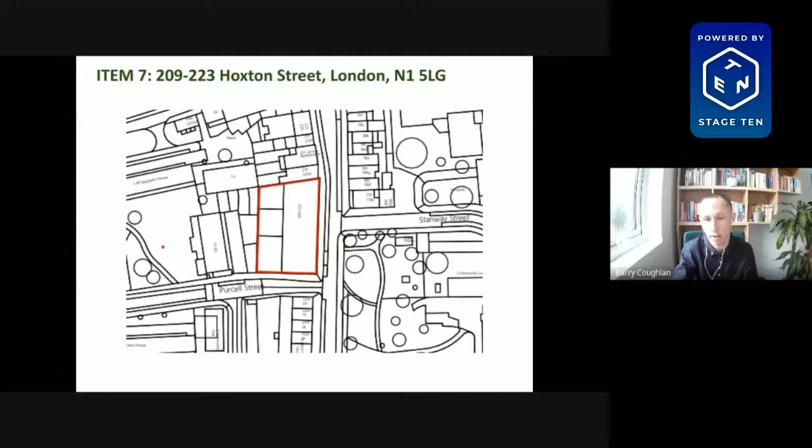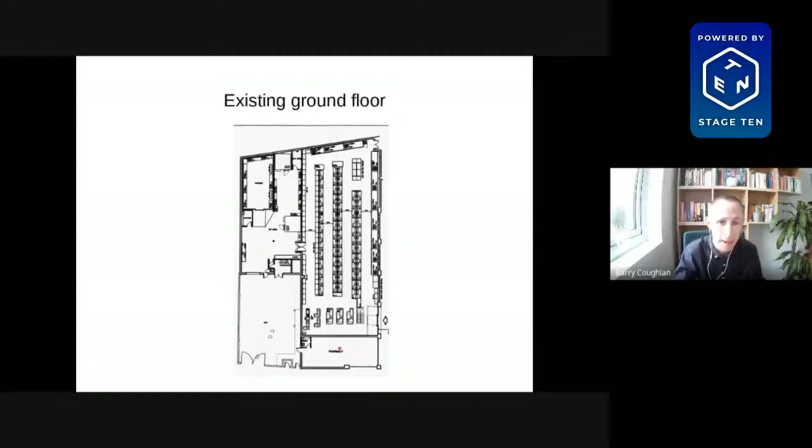The proposal would result in the loss of the small retail unit. Policy does seek to provide small retail units in retail developments of this size.

However, in this case, given the nature of the surrounding context where there are already a large number of small independent retailers, and given the benefits that a large retailer brings to the vitality and vibrancy of the town centre, the loss of that unit is considered acceptable.

This is also subject to a contribution of £30,000, which officers have secured in order to be put towards general improvements in the immediate area and to support small retailers.

It's thought that these two matters combined make the loss of the retail unit acceptable. It's noted that there's been a slight change in the wording of the relevant policy as it relates to the small independent unit. However, overall, it's not considered that this change would make the loss of the small retail unit unacceptable on this occasion.

It's worth pointing out that this was found acceptable previously, and that the surrounding context has not changed significantly since then.

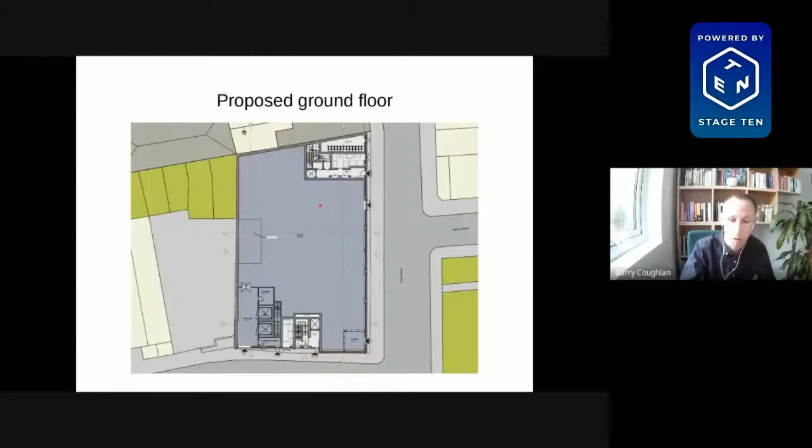We'd like to extend the condition to restrict permitted development rights away from use class E(a). We can provide further detail on that, but just to make that verbal change now, if possible.

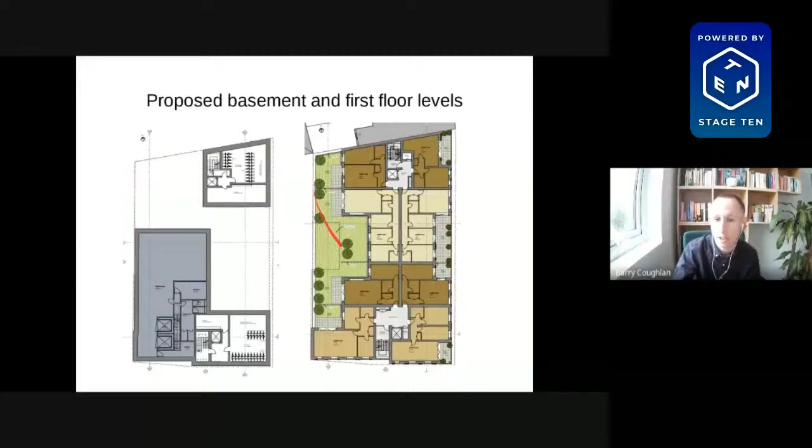Just running quickly through some of the layouts, you can see how the building is recessed in certain areas to break up the massing. You can also see the provision of landscaping at this podium level to some of the units at the rear there.

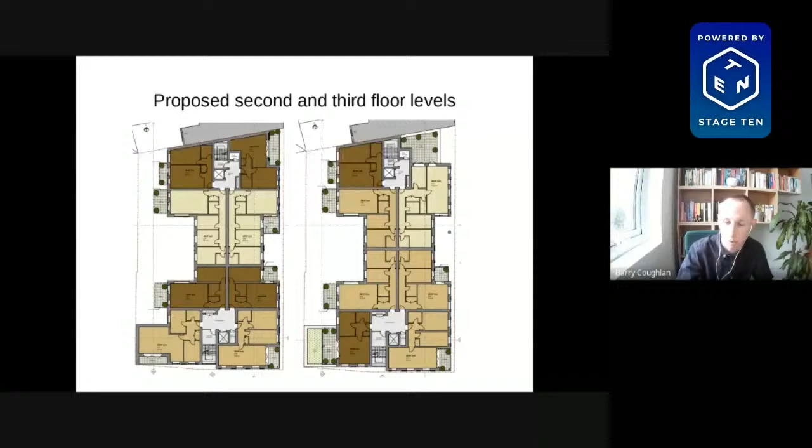Just moving through some of the other floor plans, you can see how the units are laid out. There's access from two cores. Each of the units meet the minimum space standards and have acceptable provision of daylight and private amenity space.

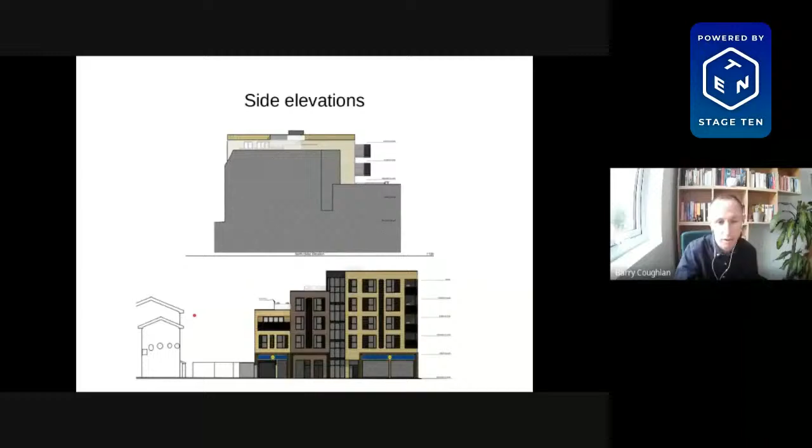You can see how the building steps down away from the corner to address the context of residential buildings to the rear. These are the front and rear elevations.

You can see again how the 5-storey element is on the corner, stepping down to 3 storeys as it abuts the buildings to the north.

You can also see the change in materiality and how this is intended to break up the bulk of the facade. You can see the rear elevation here as well, and the position of windows and balconies as they relate to the rear elevation.

So just turning to the residential use briefly, as with the previous proposal, the proposal is for 25 PRS units to be provided. That's private rented sector units.

These differ slightly from residential units in that they're all held by a single owner and held in the same management, and they're provided as self-contained units let separately for longer tenancies than are ordinarily the case for private sector rented units in the open market.

So the benefits are that it provides greater security of tenancy, better management, and also allows a more professional on-site management.

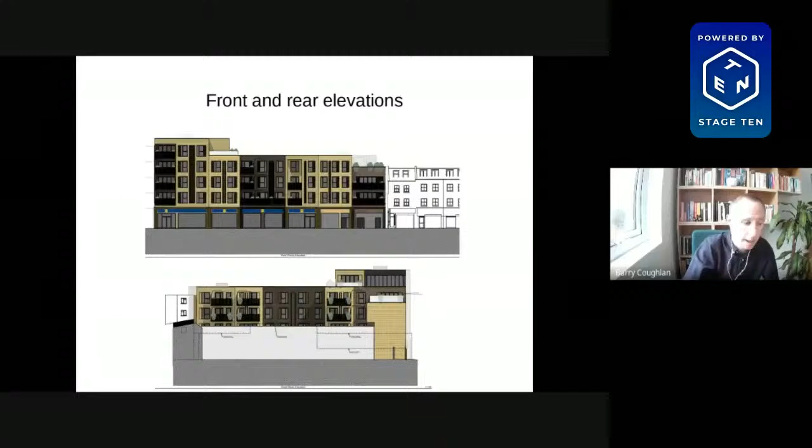The impact on this green space has been assessed, and the extent of overshadowing caused by the proposal is negligible. So overall, those impacts are considered to be acceptable.

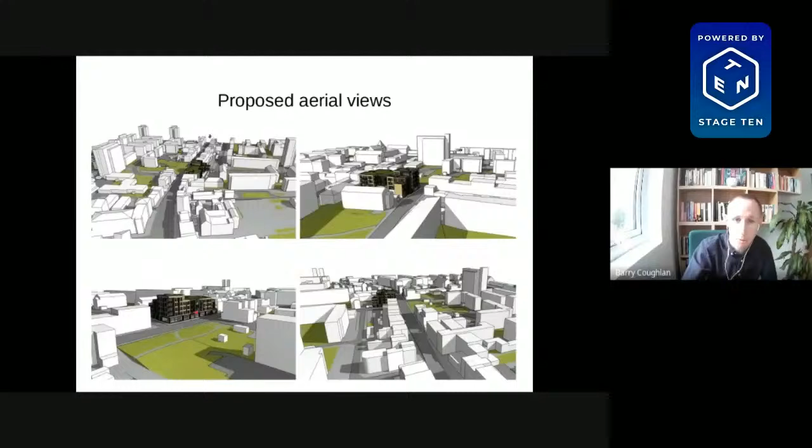This is a view looking north up Hoxton Street. With the proposed development in place, you can see how it raises on the corner of Purcell Street, but then drops down as it gets towards the context to the north.

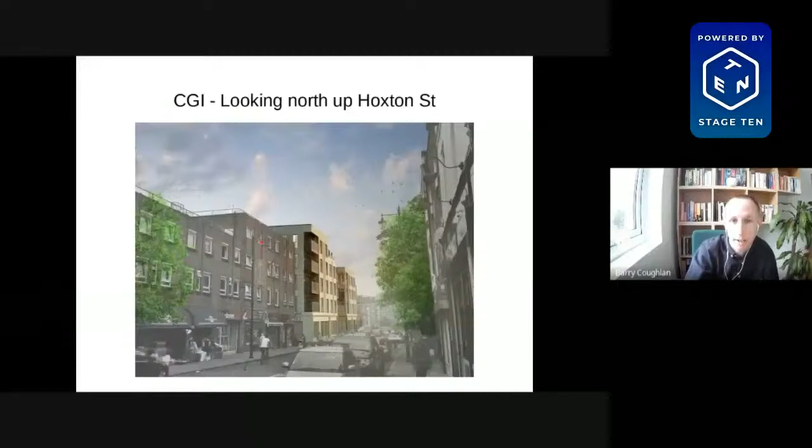This is a view from the opposite side of the street on Stanway Street, and you can get a feel for the proposed architecture, the change in materiality, and the use of brick and recessed balconies. This is a view from Purcell Street, with the proposed development in place, and you can see how it drops down, or steps down, to address the residential units to the west.

This elevation is also where the development will be serviced from, so it'll be serviced from the street, which officers consider acceptable. On Saturdays, given the market operating, a condition is recommended that would restrict the use of HGVs on that day, but otherwise the transport impacts are considered acceptable, and overall the scheme is considered acceptable.

The sustainability contributions and conditions have been updated to reflect current policy and are also considered acceptable. Overall, the scheme is considered acceptable and is therefore recommended for approval. Thank you, Chair.

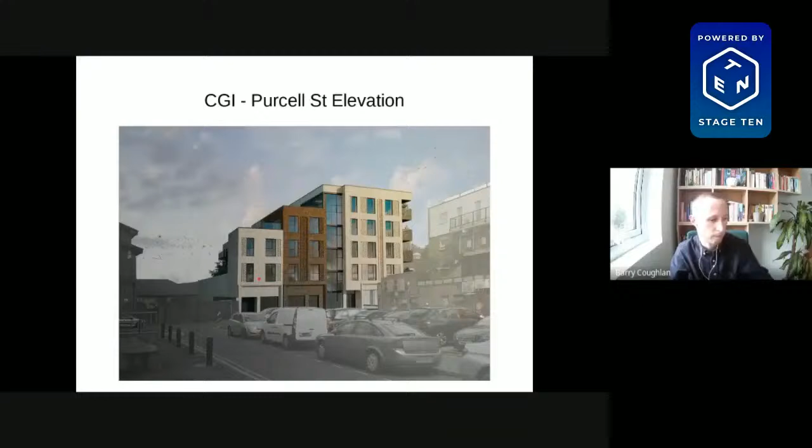Committee, my name is Chris Betteridge. I'm planning consultant on behalf of Iceland Foods.

The subcommittee will be aware of the need for affordable housing in the borough. Policy LP15 requires residential build to rent developments to be made of 50% affordable housing. The application proposal only provides 36%. Adams Integra, specialist viability consultants commissioned by Iceland, advise that the proposal can deliver more affordable housing whilst remaining viable.

Adams Integra advised that the applicant's viability assessment contains assumptions which have not been robustly challenged by the council's assessor. Build costs are excessive, with a number having been agreed on a meet-in-the-middle basis without any supporting evidence. The design fees are excessive, with a flat fee of 10% applied, resulting in a cost in excess of £1 million, with no specific evidence to support these fees.

Finally, a greater return could have been achieved if the proposed retail unit had been open to offers, including an offer from Iceland. A more robust assessment of the applicant's viability assessment would suggest that up to 3 more affordable dwellings could be delivered. Given the need for affordable housing, the council should take a more robust approach to reviewing viability assessments, requiring applicants to fully evidence any reduction in provision. The applicant has provided insufficient evidence to support its case for a reduction in the affordable housing requirements.

Local Plan Policy LP37 states developments of retail units of 1,000 square metres must provide a small retail unit. No small shop is proposed and no justification is provided.

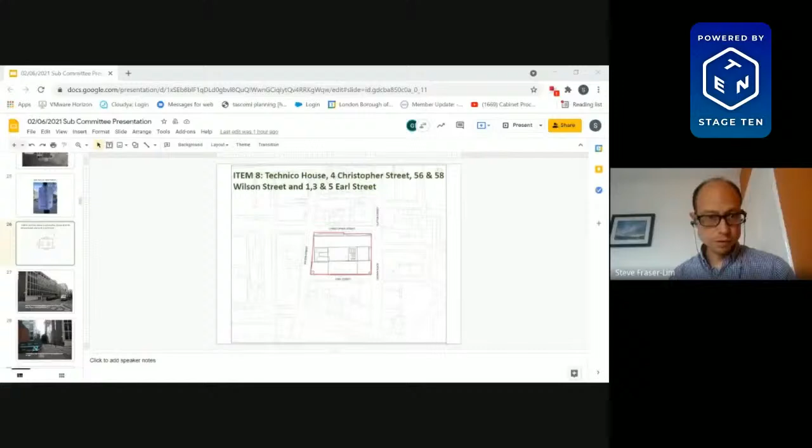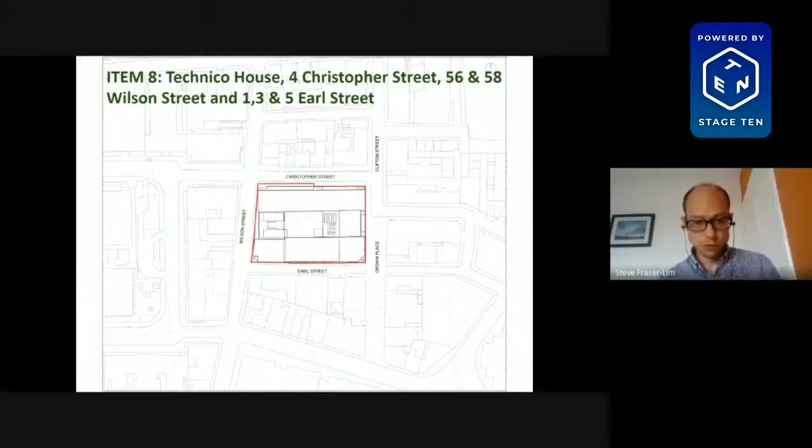Okay, so application site is Technico House. It forms its own block surrounded by Christopher Street, Wilson Street, Earl Street, and Clifton Street, and part of Crown Place. This is one of the two buildings that form the single site Technico House, looking down Clifton Street with the application site on the right.

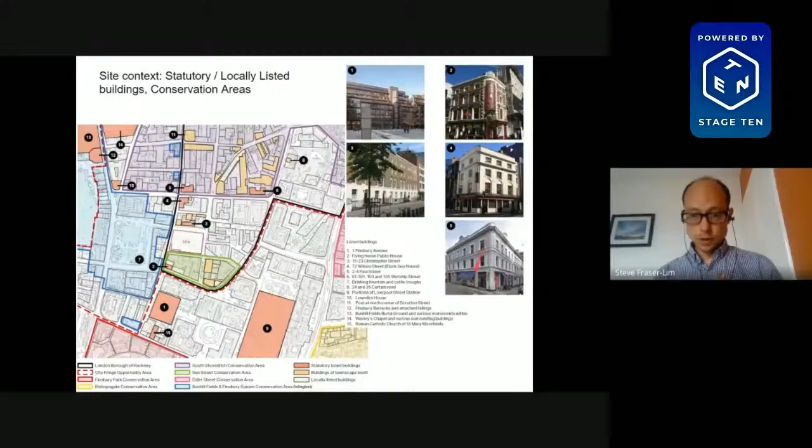There's a number of listed buildings around and about. For instance, number 3, 15 to 23 Christopher Street is Grade 2 listed, just on the opposite side of Christopher Street to the north. The Flying Horse Public House is also listed, on the corner of Sun Street and Wilson Street, and there are other heritage assets around and about.

The area is also within the Central Activity Zone, within an opportunity area in the London Plan. There's been a number of other large-scale developments that have taken place around and about, either in the neighbouring area, which is City of London, or in Hackney itself.

For instance, number 1 is 2 to 3 Finsbury Avenue - a large-scale development that's been approved, referenced in the committee report. Number 2 is 1 Crown Place. Number 3 within Hackney is, I think, 14 to 15 Appold Street, a 45-storey building, and various other large developments, for instance Principal Place and the Stage, not that far away.

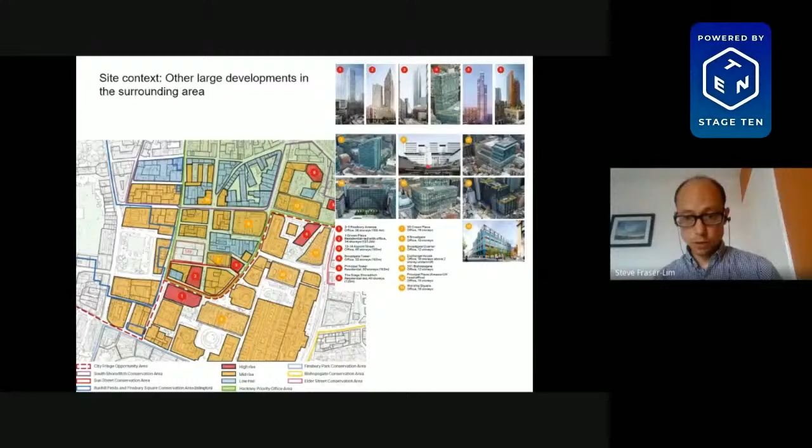And then in the City of London, for instance, you've got nearby other developments as part of the Broadgate Quarter here, for instance building number 8, which is relatively close to the site.

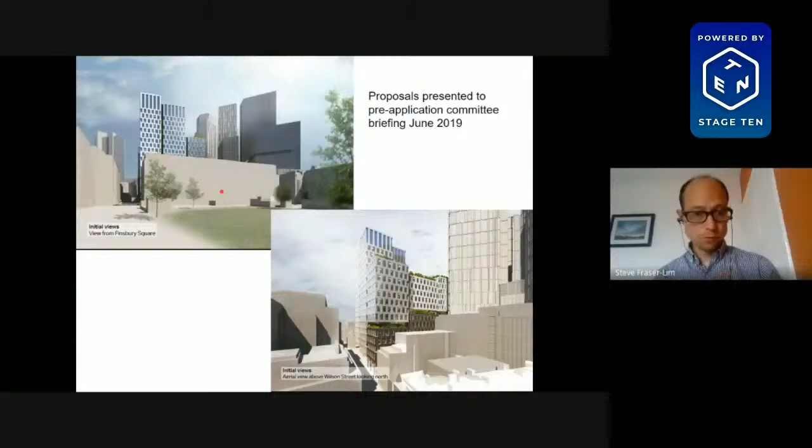Members may remember the application from the pre-application committee briefing - there was a briefing in June 2019, when the proposals were for a series of tower elements. As the proposals changed due to discussions around the site designations, conservation areas, listed buildings, views and things, the massing reduced, or the overall height reduced, but the massing was still a concern, as you may recall from the November '19 committee briefing.

So we move on to our current proposals, which have responded to the pre-application discussions, the issues raised, and the design review panel comments.

On the ground floor, we've got the main office entrances from Clifton Street and also from Wilson Street, retail on the corner to provide active frontages and interest at street level, a loading bay area to service the development from Earl Street. There's an entrance here to access the basement cycle parking, and also an affordable workspace facing onto Christopher Street, on the north side here.

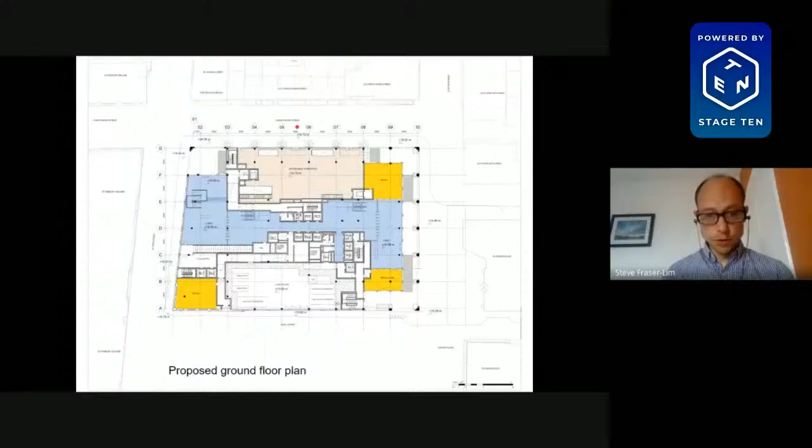At the basement level, there's still a substantial amount of affordable workspace here, also cycle parking, and other cycle parking facilities - a cycle hub facility for repairing and maintaining bikes and things like that.

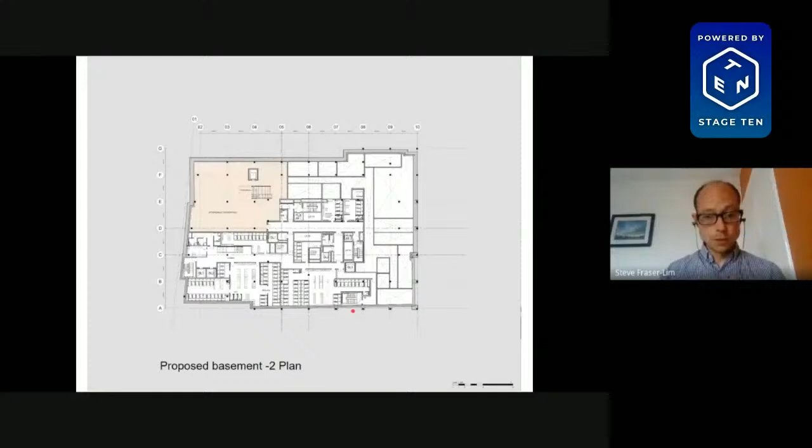And then at basement 2, there's also other ancillary facilities for staff, showers and lockers and things. There are a couple of other basements, but that's containing plant, a couple of basement floors below that.

Moving upwards, you've got the upper floors. At the lower levels are a large office floor plate with a central core, but then you can see how the massing has cut back to mitigate the visual impacts of the development in various street scene views.

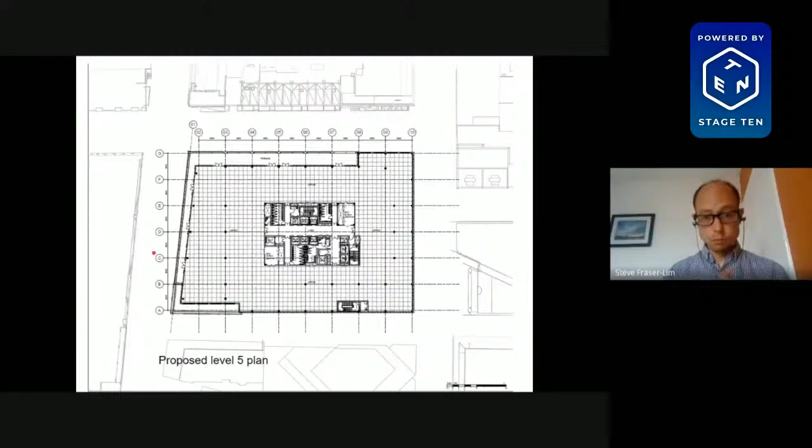So this is the setback above that retained facade at the corner there. And then as you move upwards, there's further setbacks to the north, to the west, then a wedge cut away from this southeast corner, and then further cuts back to the facade to reduce the massing.

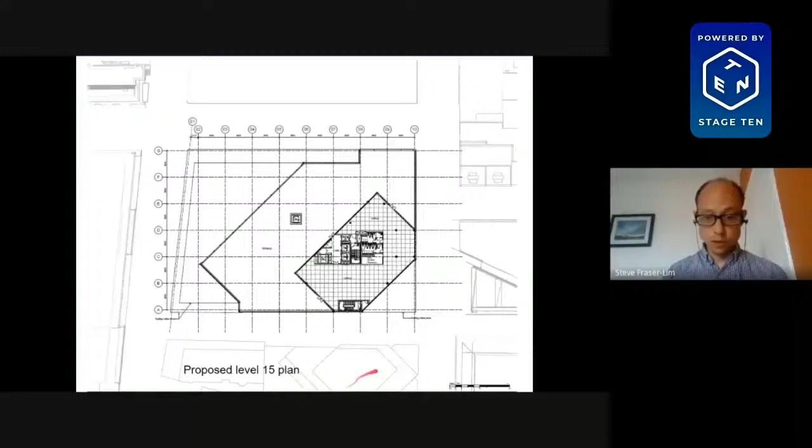As you move up the building, that's up to level 10, level 15. Again, you're now at the tallest element here, and it's also cut at an angle to reduce the impact on 1 Crown Place to the south there. And then plant and servicing, building maintenance facilities, equipment at the top.

Here the building facades, and you can see the articulation of the massing and the cutaway elements here. This is the north elevation of Christopher Street.

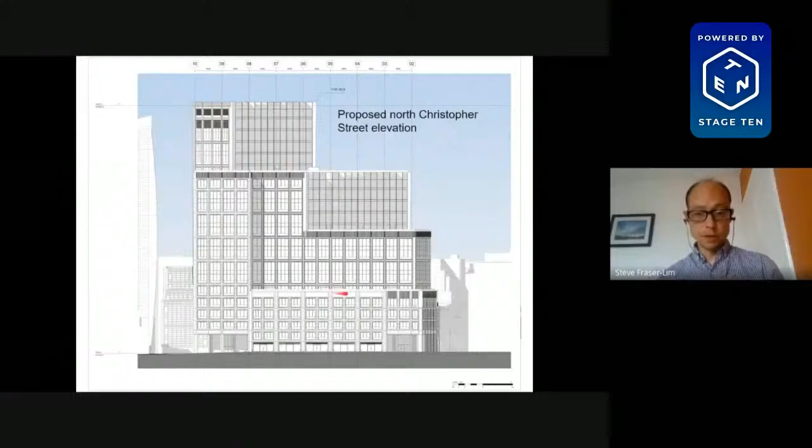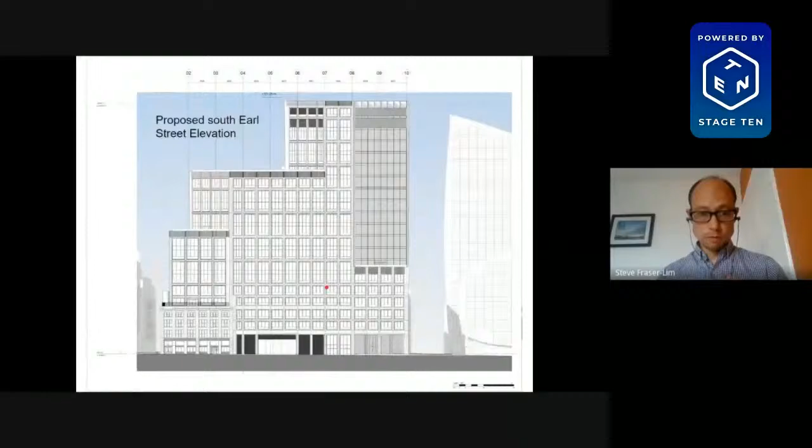So there's the base of the building, and then a middle section which is set back a bit to reduce the apparent massing of the building, and then the taller elements at the top. And you can see the Clifton Street elevation. There's a wedge there cut into the side of the building. Earl Street and Wilson Street.

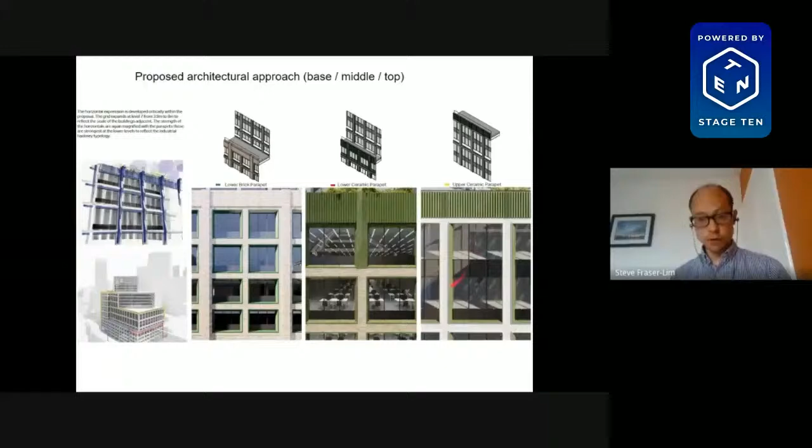The architecture, you can see you've got those three elements. You've got at the base of the building, predominantly brick, some terracotta, green terracotta window reveals, some parapets are ceramic parapets, green, at the mid-level, and then at the top it's lighter with more concrete frame, and also significant amounts of glazing where you get that wedge slice through the building.

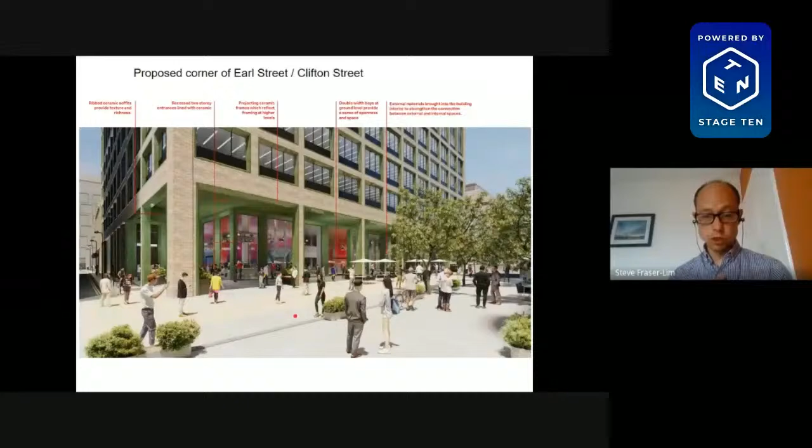And then you can see now the base where the building relates to the ground floor and the surrounding streets, with those retail units on corners, corner of Earl Street, Clifton Street, Christopher Street and Clifton Street, so looking down from the north a bit, and then the corner of Wilson Street and Christopher Street.

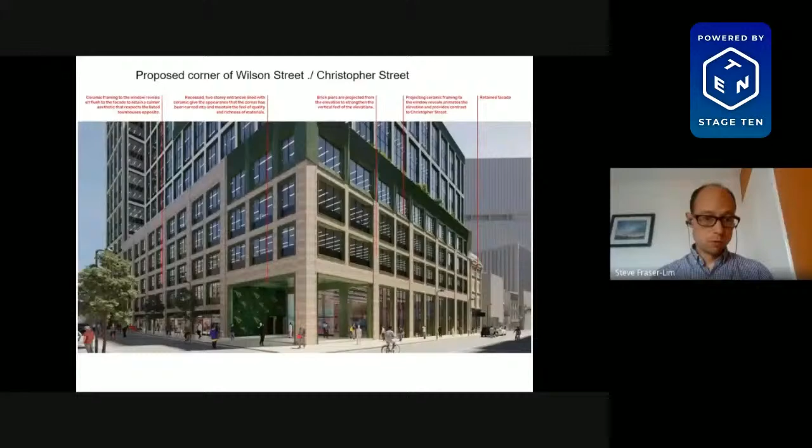So this is one of the office entrances there into that space. The corner of Wilson Street and Christopher Street.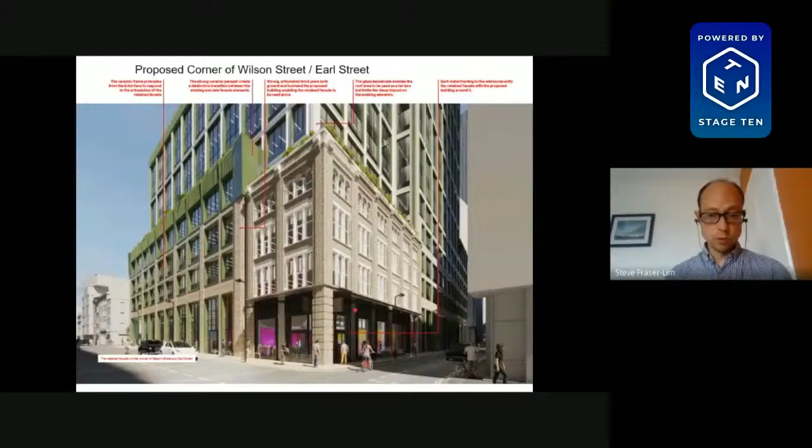So the proposals do retain this facade that's existing on the site at the moment. I should add on this slide, we're not happy with the proposed shop front that's to be installed, shown on this plan for the retail unit on that corner. So there's a planning condition to require a more traditionally designed shop front, which the applicants are happy to redesign. So we'll deal with that at the condition stage.

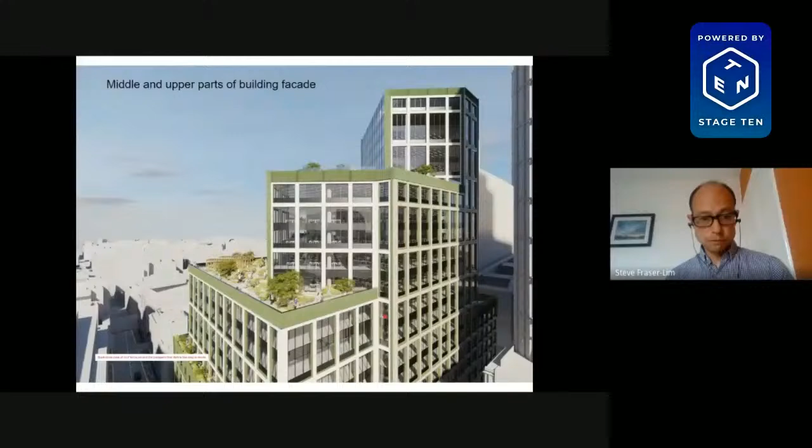And then you can see the upper parts of the building as it cuts and slices back to reduce the visual impacts from the different views. And again, you can see the glass slice through here, the light elements contrast with the more solid base further below.

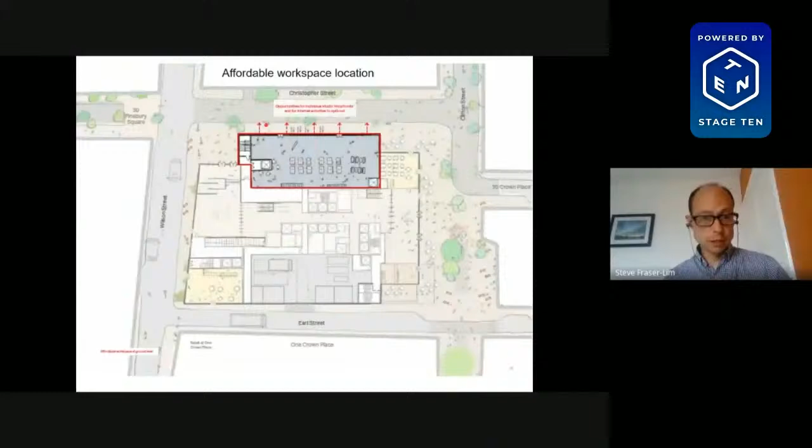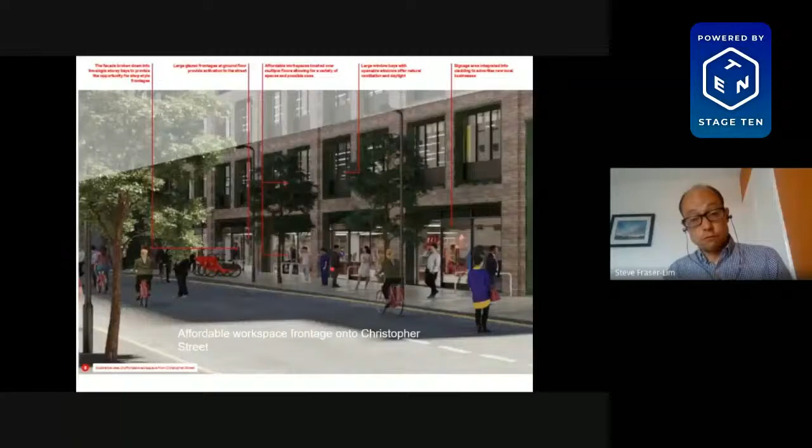Just a bit on affordable workspace. This is the ground floor. It's got direct access onto Christopher Street to the north there. And this shows that facade. So there'll be ability for occupiers to have window displays, shop fronts, and also ease of servicing and bringing things in and out.

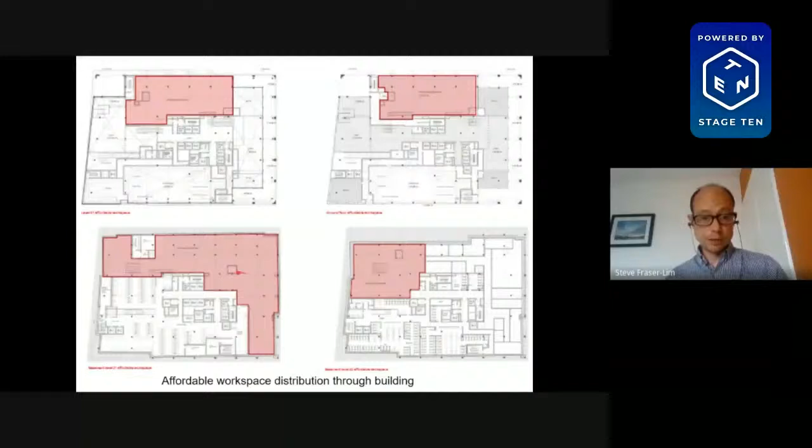The affordable workspaces on ground floor, and then there's also a mezzanine level above ground, and then two lower ground floors. There was a concern raised during the application stage about the light to the lower ground spaces, but we feel that's been addressed with some light wells introduced within the building, and also pavement lights and a staircase feature to bring light down into the lower levels.

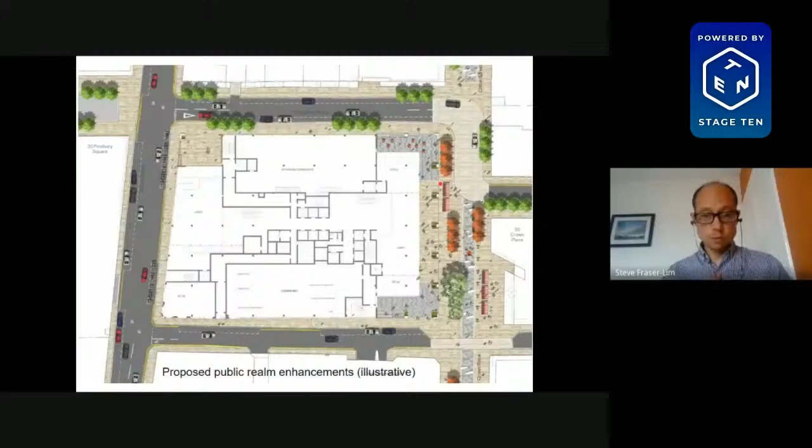It's at the moment, because the detailed design is yet to be fully worked out, but it will involve new surfacing and paving, street furniture, and landscaping, with the ability to accommodate market stalls and similar flexible uses during the day.

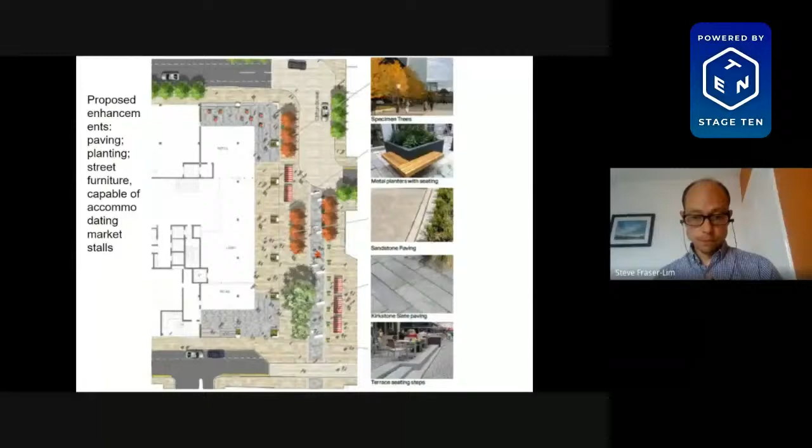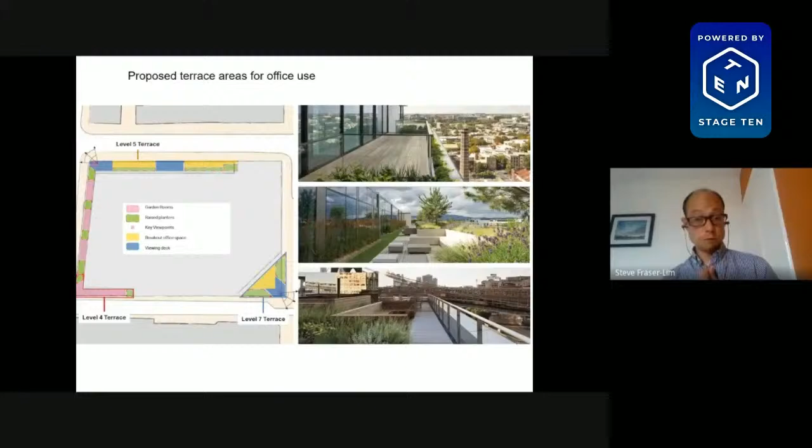The cutout sections to the building provide landscape terrace areas, which will be an amenity for the office occupiers. You can see some images from the design and access statement showing how these could work.

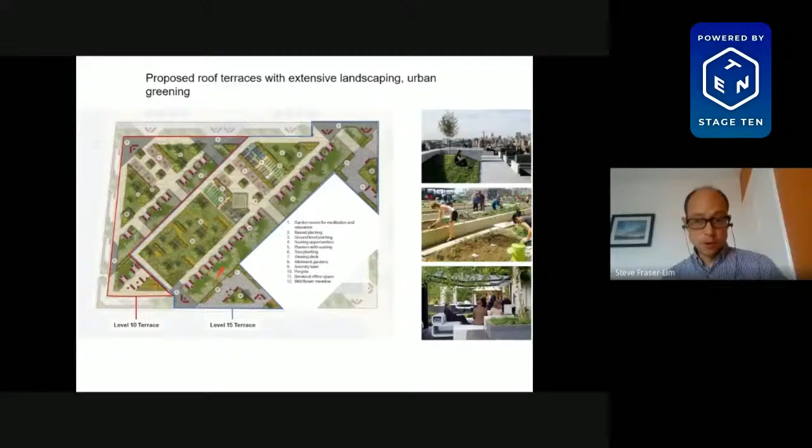They are really quite substantial in size, and the proposals are for extensive soft landscaping areas for outdoor meetings and other activities, with substantial build-up for planting, including trees.

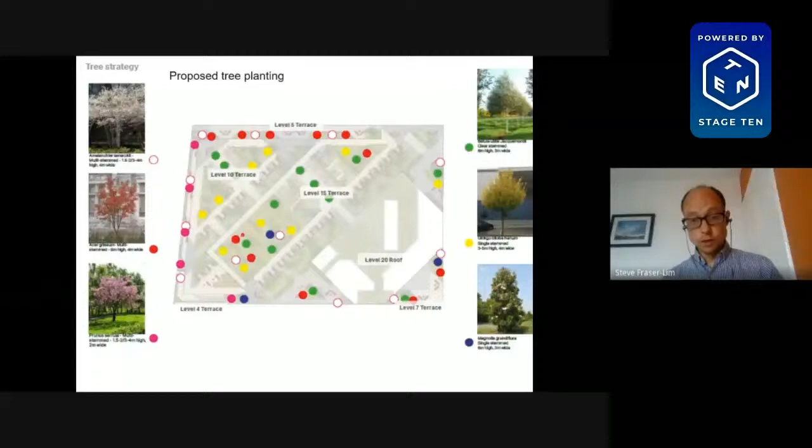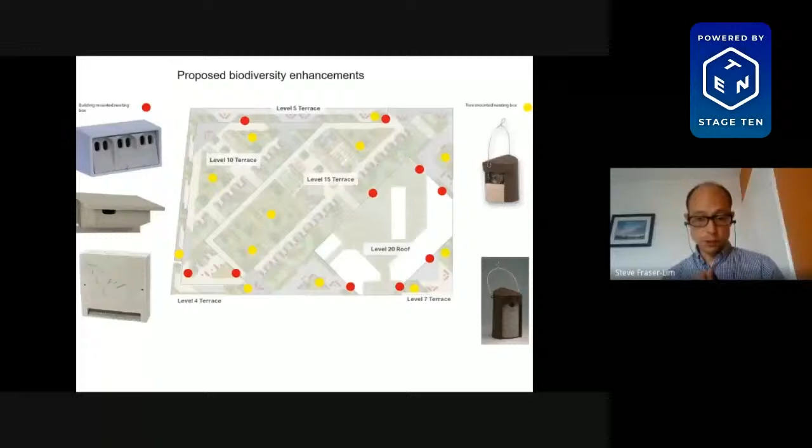So you can see significant tree planting proposals throughout the roof spaces of the building, and also biodiversity enhancements in terms of bird and bat boxes. The proposals will be quite beneficial in terms of urban greening and improving the urban green factor of the site.

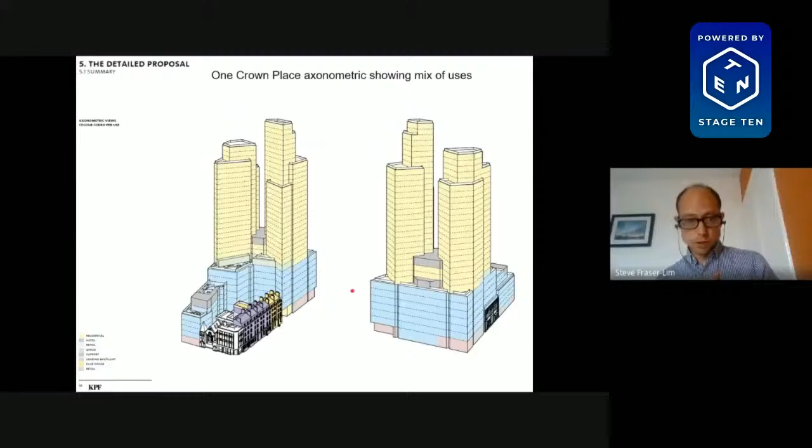And you can see this is the view from One Crown Place — this is the facade that will be immediately adjacent to the application site. We've looked at the layouts, the flat layouts of that development, as well as visiting the site itself, as you can see from some of the photos.

And then on level 7, there's a shared amenity area for occupiers, and also an external amenity space, which has been assessed for overshadowing impacts. The main areas that are affected are this north tower.

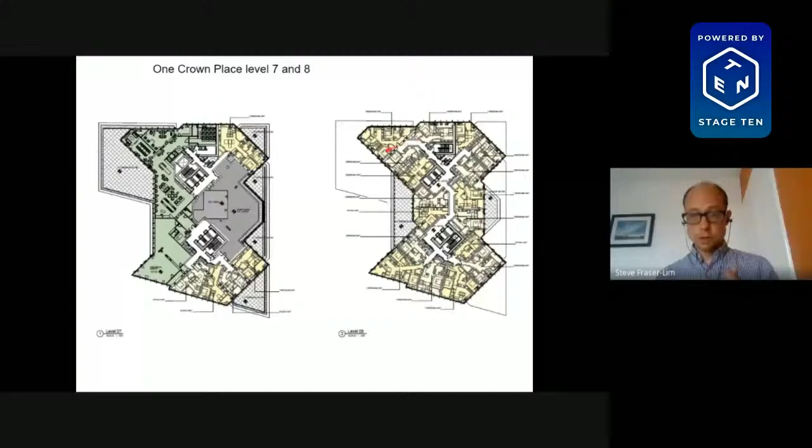You've got these corner units, which have a bit more of a dual aspect, so the impact is slightly less on these units, but there are some single aspect north facing units in that gap, which will be the most affected, particularly at the lower levels, for instance level 8, and then as you rise up through the building, levels 9, 10, moving up to level 24 and 25. Beyond that the daylight sunlight assessment doesn't really consider impacts because they'll be higher than the proposed building.

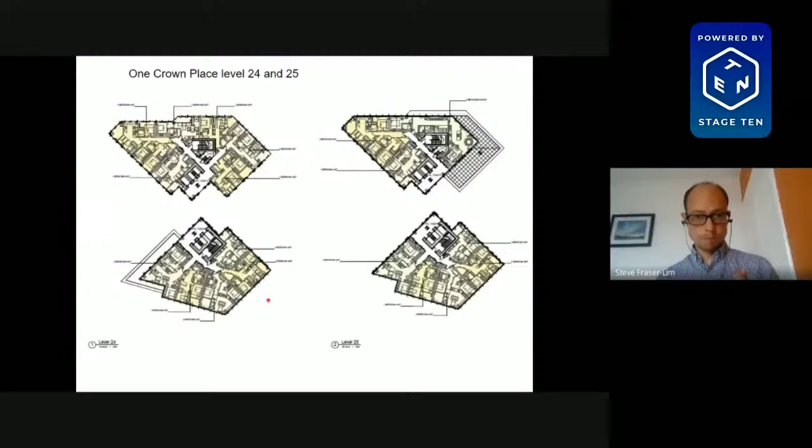I would also, just a couple more slides. In terms of daylight sunlight assessment, you can see there's quite some discussion of that in the committee report, and I'm sure you'll hear further from speakers as well.

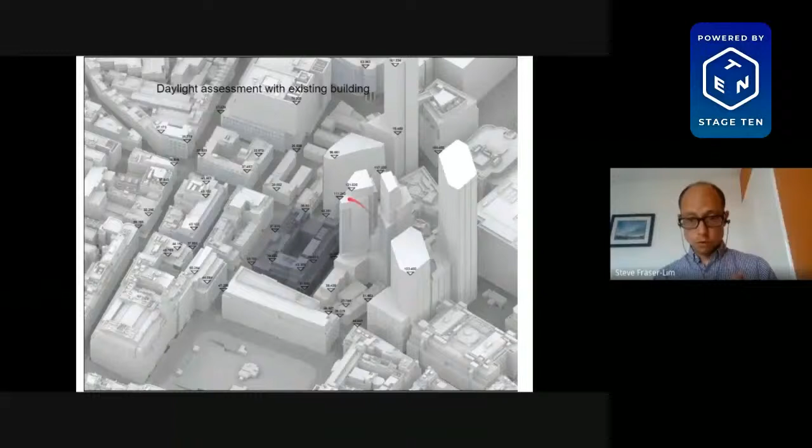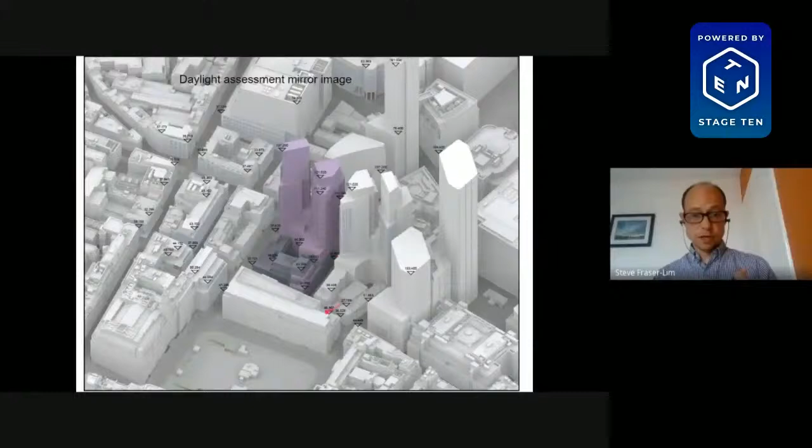This just shows the assessment with the existing building. This is One Crown Place to the south. That's the application proposal, so the impact of that building on daylight on the northern tower of 1 Crown Place has been assessed. You'll also see referenced in the committee report a mirror image assessment—if the application site were developed to the same massing as 1 Crown Place, what the daylight impacts would be. That's discussed further in the committee report.

I would also draw members' attention to the addendum reports. There are a couple of corrections in the reports, and also some updates in terms of the public realm. We've now got the estimate agreed between the applicant and the council for the public realm works, and that's set out in the report there.

That also includes, as well as that area on Clifton Street which will be enhanced, improvements to the corner of Christopher Street and Wilson Street, where there'll be a raised table similar to what you see at the back of Principal Place. A similar idea to that as well.

There's also been some discussions on affordable workspace, and the applicant proposal is for 8% of floor space, which is a bit less than the policy, but with a higher level of discount for that space, which we consider to be a good offer in terms of affordable workspace, as we've set out in the addendum report. I think everything else is as per the committee report. Thank you, Chair.

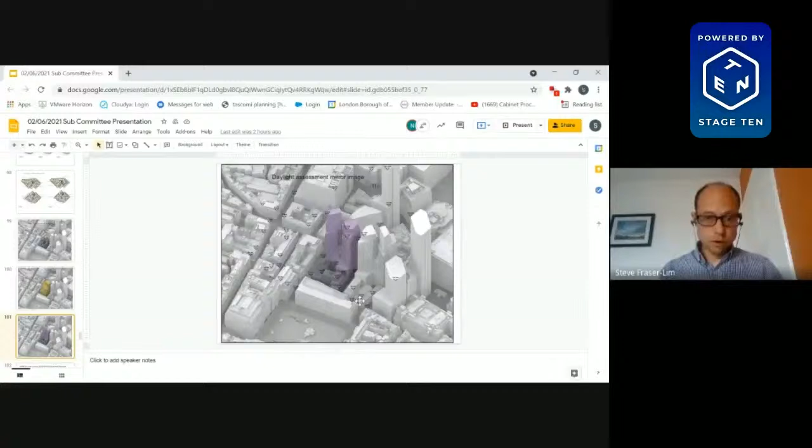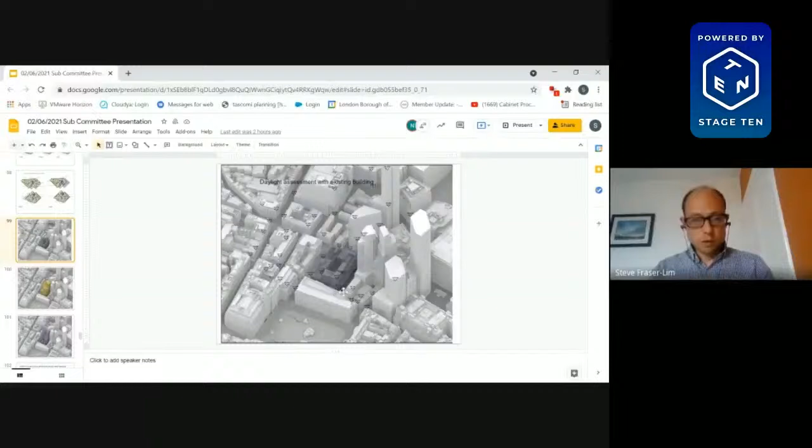So when you look at the site, it's in the central activity zone. It's within an opportunity area. It's very high PTAL, it's next to the City of London area. So the planning policies are looking for an intensification of development on the site. The existing building is relatively low rise in comparison to some of the other developments that have taken place further to the south and to the east. And so our view is that there is an expectation that a larger building will happen on this site than is currently there.

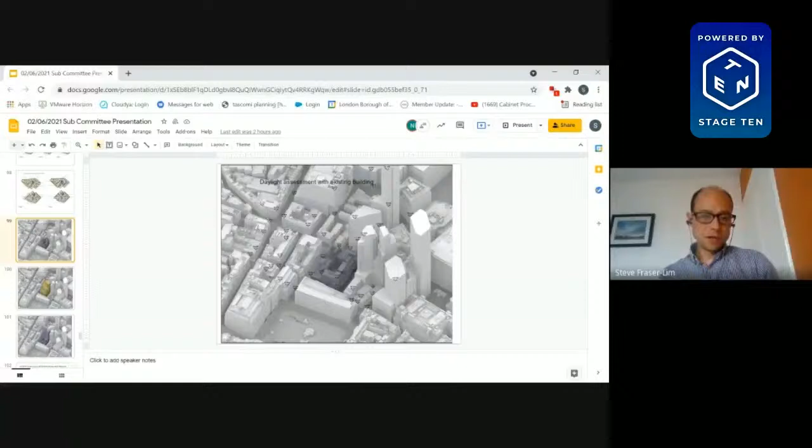I suppose the applicants have raised concern about the reliance on a mirror image massing. They say that is more appropriate if you've got a cleared site next door, where you're going from nothing there currently to a large building, which would result in some very significant impacts. But nonetheless, we feel there are some similarities to that situation here, because you've got a relatively low-rise building with the expectation that it will be developed to a bigger building.

So as part of the assessment, the BRE guidelines talk about that if a development is built, for instance, One Crown Place, very close to the boundary, the phrase used from the BRE guidance is that it's taking more than its fair share of light, and in some respects could be considered a bad neighbour, and therefore there's the expectation that somebody else will come along and develop the site next door in a similar way. One way to assess what would be a reasonable level of impact is through this mirror image massing, which has been undertaken and does show that the application proposals would have less daylight impact than the mirror image version.

The mirror image is, as the objectors have highlighted, one part of the assessment. There are other things to take into account. In the committee report you'll see reference to average daylight factor, which is another way of assessing daylight, taking into account the whole room rather than just the window. That technique's generally more appropriate for new developments, but it can be used in situations where you've got a development under construction. That's also part of the assessment we've taken into account, as well as other references to daylight impacts from other developments around and about.

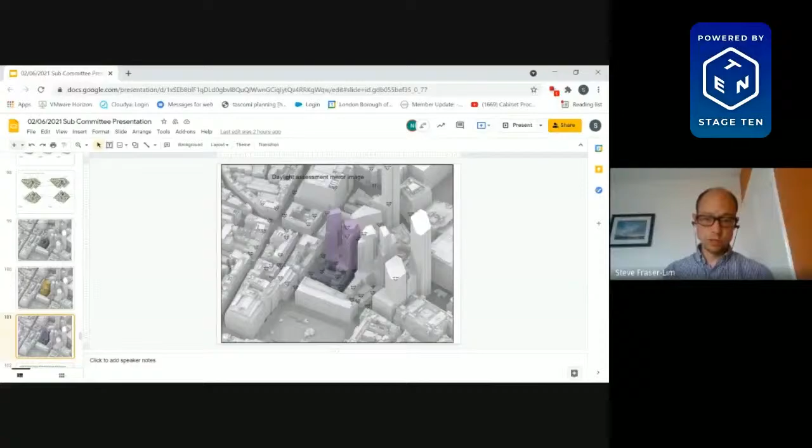Okay, two further questions. The objector talked about appeals decisions, and he inferred that those appeals decisions led his daylight people to think that you're not in the same sort of area really as those. Have you considered that?

Yeah, a number of different appeals have been referenced within the applicant's daylight sunlight assessment, and also the objection letter from the One Crown Place team. So we are mindful of that, but I think every site is different. What we're also mindful of is other applications we've considered in Shoreditch. The situations are never the same, but part of the character of Shoreditch is narrow streets, buildings right on the back edge of the footway, and really significant daylight impacts are not unusual when we're looking at some of the other developments that have happened around and about, if a development is to take place in that environment where it gets to a similar height to buildings around it. So that's something else we've also been mindful of, really.

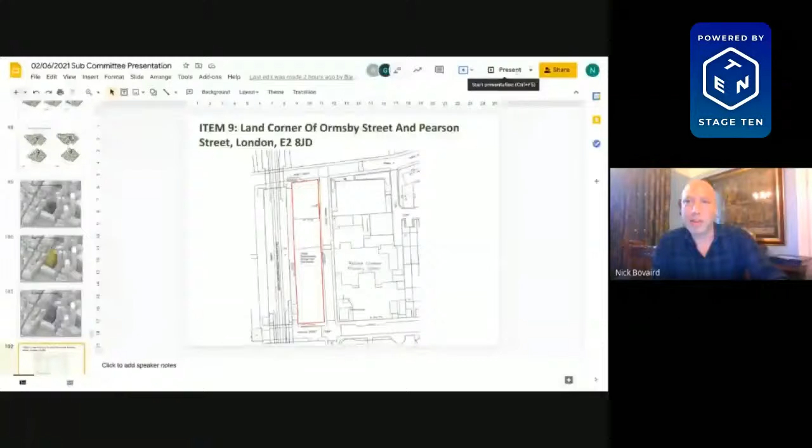Sorry, an error occurred when screen sharing. That's never happened before, so I assume it won't happen again. Yeah, and it's not happened. This is the first time we haven't got the slide pack sent to us. Okay. Here we are. Hooray. Very good. All right. We're good. Good to go. It's in the right place as well.

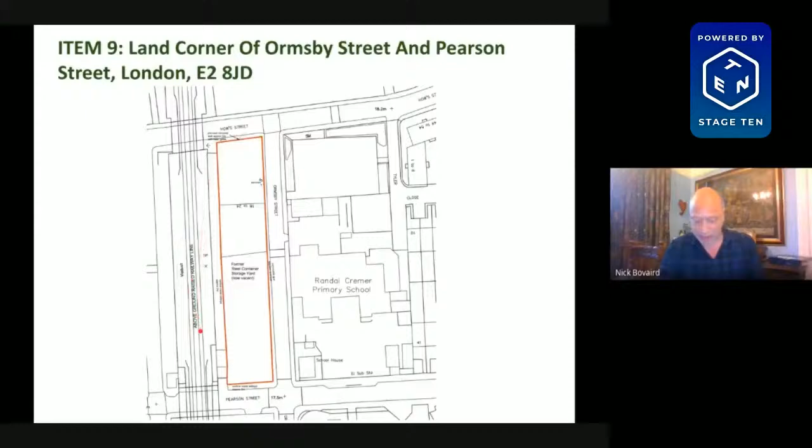Let me just get the laser pointer on so I can help you with that. Okay, so the application is 2020-4117 for land bound by Ormsby, Pearson and Hows Streets. This is a cleared site bounded by Pearson Street to the south, Ormsby Street to the east, and Hows Street to the north. It runs alongside the overground railway viaduct to the west at Hoxton Street Station, separated by the access alley to the rear of the railway arch businesses that front onto Geffrye Street to the west.

This is the aerial view towards the site looking northwest. Randal Cremer Primary School lies across Ormsby Street to the east. To the south may be seen a single-storey warehouse on a similar sized plot to the application site. The site isn't within a conservation area, but across the railway viaduct lies Kingsland Conservation Area and a residential terrace on the south side of Pearson Street here that's grade 2 listed.

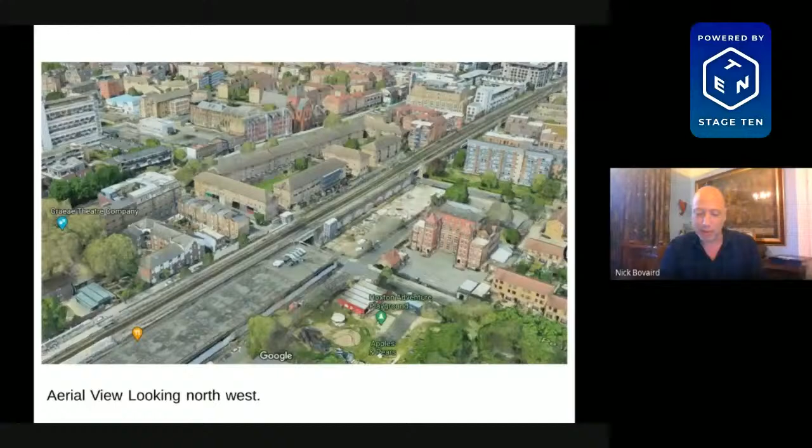The proposal's for a temporary permission of 5 years. This would change the use from the storage of shipping containers to a mixed-use development consisting largely of office units with some storage units and a 44-bedroom hotel. These units would also be constructed of shipping containers.

The second application introduced office units, though in a lower proportion than can be seen here. And that application went through a number of revisions prior to the cyber attack on the council systems, at which point it was rendered unavailable. This new application reflects a priority office area that the site's in.

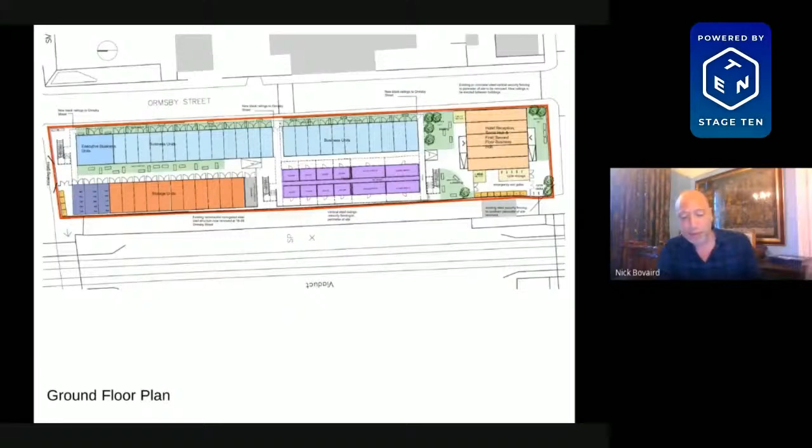The biodiversity of the site would be improved from the existing situation. The existing street trees on Ormsby Street would be retained and the site would be landscaped. Bird and bat boxes would be placed at eaves level with rubble piles, log piles and bug hotels in the amenity areas. Biodiverse roofs would also be provided.

Although the units are shown here as quite constrained spaces, reflecting the shipping containers used for the construction and being intended to provide space for new and small companies in relatively low-cost accommodation, the units have a flexible wall system to allow enlargement of individual units as and when required. As laid out in the committee report, the proposed standard of accommodation for the commercial occupiers is considered to be good.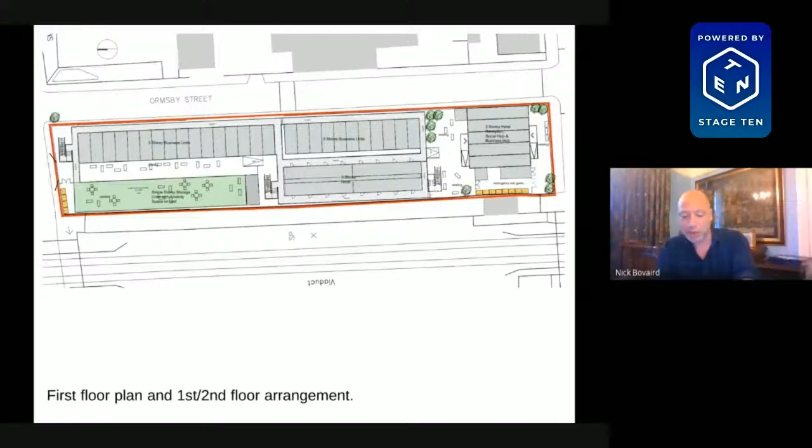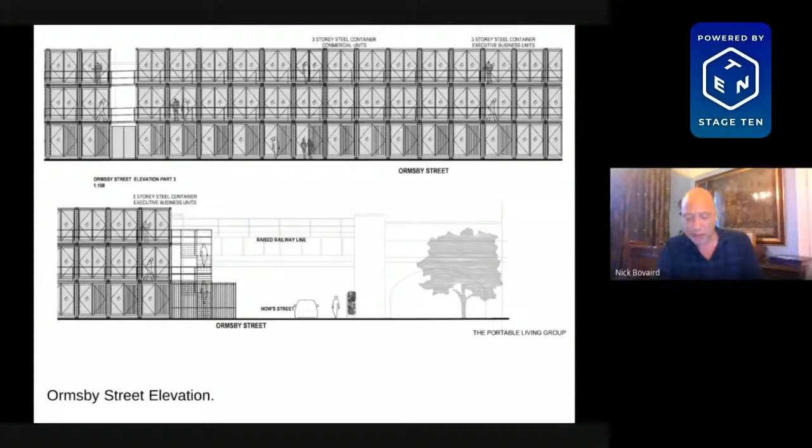This slide shows part of the Ormsby Street elevation, where large windows to the office units provide good levels of daylighting for the workers. This site has been used for the storage of shipping containers throughout its recent history, so in that sense, the proposal doesn't represent a great change. Clearly, however, the proposed shipping containers, painted and opened up by windows, present a better appearance in the townscape than the existing use. The removal of the existing concrete boundary wall and its replacement by railings would also help in this regard.

These show the elevations of the buildings across the whole site.

As laid out in the committee report, in design and conservation terms, the proposal is considered acceptable for a temporary development, given the existing use and condition of the site. The proposal is only slightly higher than the adjacent railway viaduct, so it would only be marginally visible through the railway arches from the conservation area and the Grade 2 listed terrace of Pearson Street on the other side. It has not drawn objection from the local Conservation Advisory Committee.

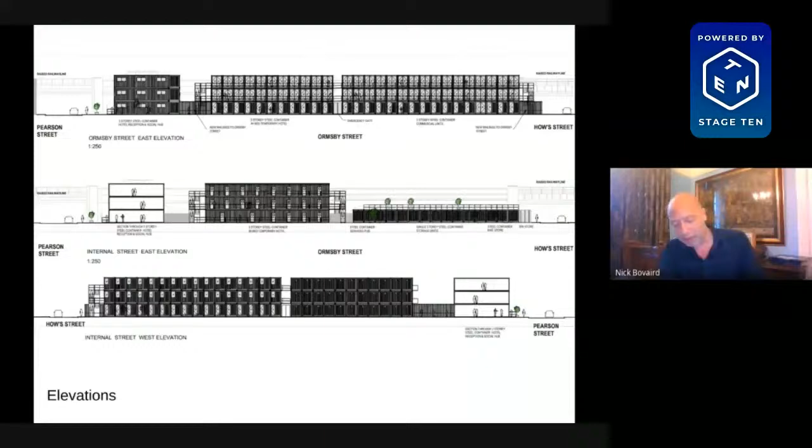The recommended conditions include a requirement to remove the buildings from the site when the temporary 5-year permission ends. This reflects the fact that while the buildings are acceptable for temporary use, they would not be acceptable as a permanent solution for this site, and the proposed use should not delay a future permanent proposal. In this respect, the recycled and recyclable construction of the design is a considerable benefit, with low embodied carbon and a quick construction period that can be replicated on any future site once the 5-year period has ended.

This is the 3-storey temporary building at the Pearson Street entrance, providing a recognisable entrance to the site and the hotel reception at ground floor level. The cross-section at the bottom shows the hotel use on the left here and the office use on the right.

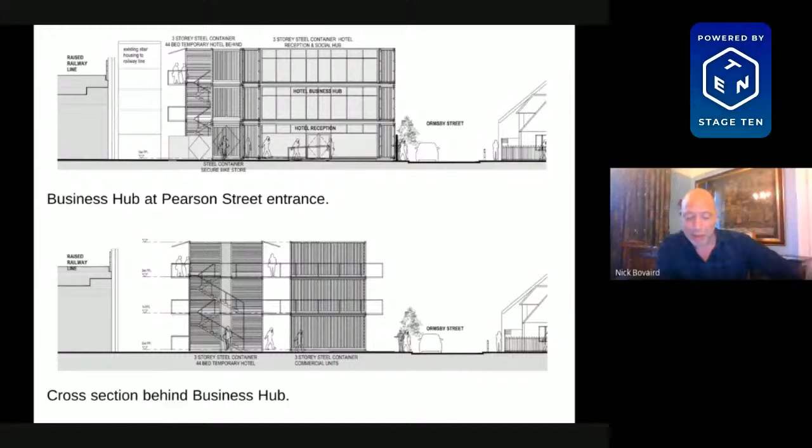The site has excellent public transport links and policy-compliant levels of cycle parking are proposed. 2 blue badge spaces are to be provided on the neighbouring roads prior to occupation. Coach parking or drop-offs would not be allowed within the times of operation of the controlled parking zone.

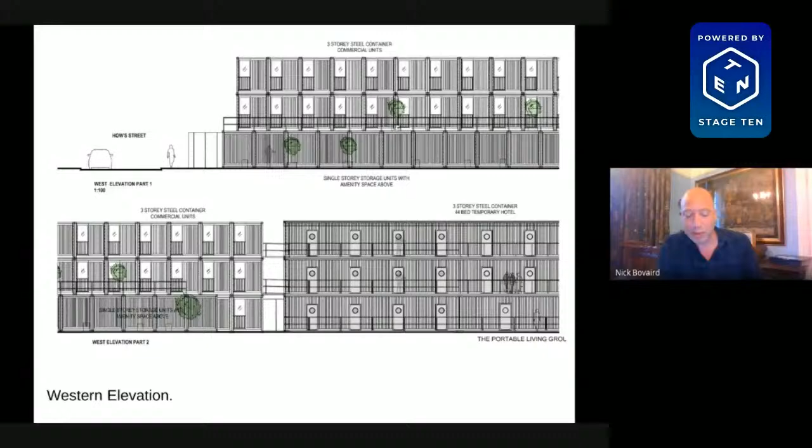Here we have a detail of the western elevation. The first floor terrace is here and here, with the office unit shown behind. And this is the hotel, facing the railway viaduct in this instance. As laid out in the committee report, the low height of the proposal and its positioning alongside the railway viaduct mean there would be no significant amenity impact on neighbouring occupiers.

The proposed hotel bedrooms are small and functional, reflecting their positioning as budget accommodation. Nevertheless, the units would be air-conditioned, connected to air source heat pumps, and soundproofed to ensure they're not affected by the proximity of the railway line.

Over this 5-year period, the 44 hotel rooms proposed will reduce the current level of need for hotel accommodation identified by the London Plan, thereby reducing the pressure on other locations in the borough to provide hotel floor space at this time.

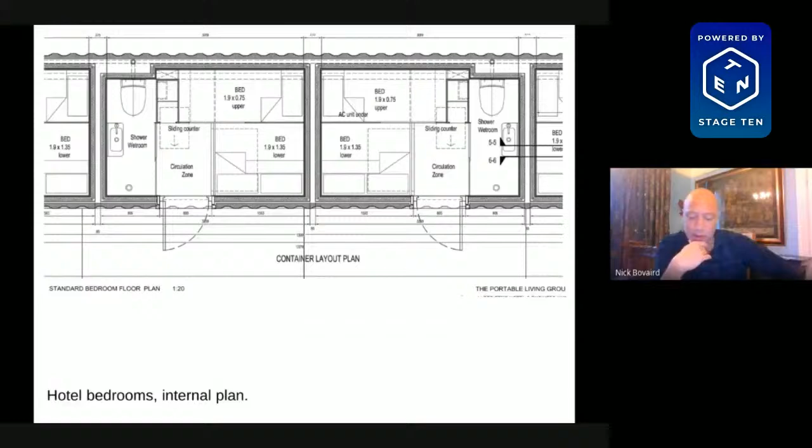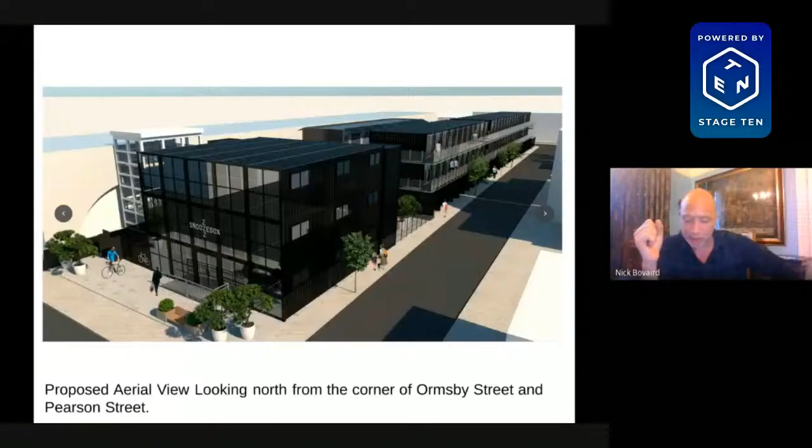This gives a good sense of why it should be considered a good temporary use for the site. The recycled and recyclable nature of the construction, and the provision of 65% of the development as offices and a further 7% as storage units, befits a priority office area. This represents a considerable uplift in the quantum and quality of jobs provided by the site, augmented by the 44 hotel rooms. So to conclude, the proposed application is considered policy compliant.

It brings an underutilised site into use prior to a permanent scheme coming forward, and would use recycled and recyclable materials, enabling a quick dismantling of the site at the end of the 5-year period. The use is appropriate for the priority office area, and though the design would not befit a permanent scheme, it would improve the setting for the period of its use. As detailed in the committee report, in these and other respects, the scheme is considered acceptable. It's recommended for approval subject to conditions in the legal agreement.

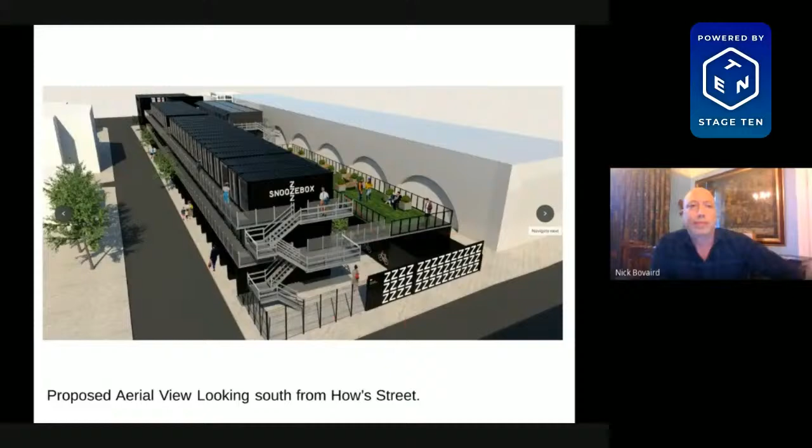So, Michael and Liam? Yeah.

Hello, my name is Liam Murphy. I'm representing Snoozebox, which is part of the Portable Living Group. The Portable Living Group was set up two and a bit years ago. We absorbed Snoozebox, which went into administration in 2017. So we call ourselves experts in events.

We build pop-up structures, for some festivals, movie crews. And then in 2018, we looked at semi-permanent deployment, working with the Olympic Park in Stratford to build our first Snoozebox hotel, which opened the first day lockdown eased last year, which was interesting. But actually it's gone a lot better than we could have even imagined.

We also have a hotel at the Eden Project in Cornwall, again not without its challenges. It's the most ecologically sensitive place we've ever built a hotel, but they're really happy with it, and that's in conjunction with the YHA. We're now looking for our next site, which will hopefully be Hoxton.

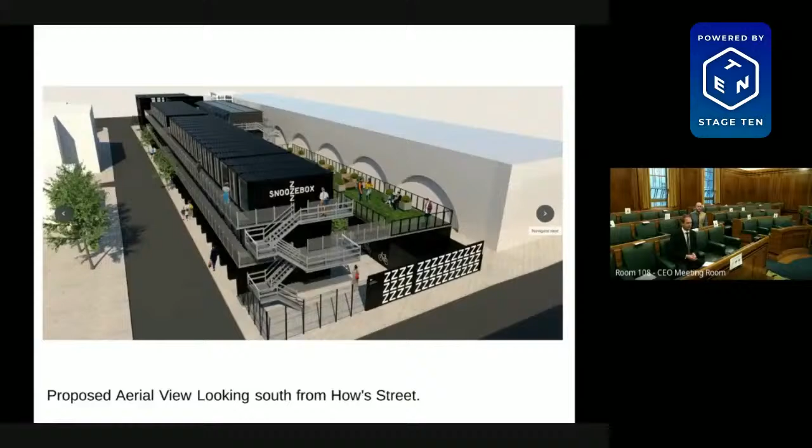Shall we ask Qasim that? Qasim, have you worked out when they're going to be able to deliver these boxes to the site? Thanks, Chair. I think what we've worked out is when they can't deliver, and that's definitely during the school operational times.

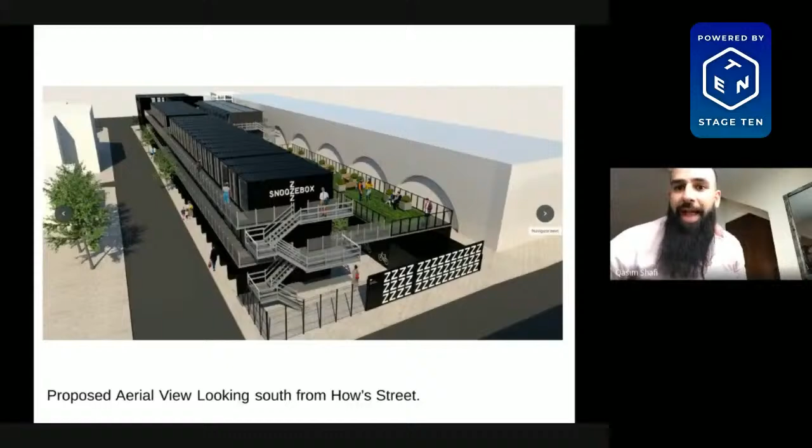And outside so they would have to work around the school streets, as council has pointed out. So within the recommendations, we've got the delivery and servicing plan that specifically wants the proposal to be worked up around the school operations, as well as a construction logistics plan, which will then look at the details of how this can be constructed with very little to no impact on the local community.

Okay, and the final question was about consultation with the school. We understand you don't have to consult the school outside the statutory process, but we wonder whether you did, and why you didn't, I guess. We have actually met the school, yeah. We met them once when we were planning to build a hotel, and the principal was pretty positive about it. At the time, they had quite a lot of issues with fly tipping, so they were happy to see something just be done on site.

Just one more question. Go on then. The other question is about the demand for these business units, because 2 minutes away from you, Guy Nicholson is going to be converting York Row Estate garages into business units, and I just wonder, what have you done, a report into demand? It'd be interesting to know, with all this stuff happening close to you, all these garages being converted to business units, as well as your business units on top of that. Okay, so there's a couple of elements to that.

Snoozebox have reviewed the employment supply demand report that was produced by Hackney Council during their local plan review and update. A company called Hatch prepared a marketing assessment report, which has been lodged along with the application, proving that there is a need and demand in the area for startup business units, affordable business units in particular. And this is one of the benefits that this development will bring because of the secondary, tertiary street location. It will, and the nature of the modular development, it will not attract a premium rental value that you would expect with standard office uses.